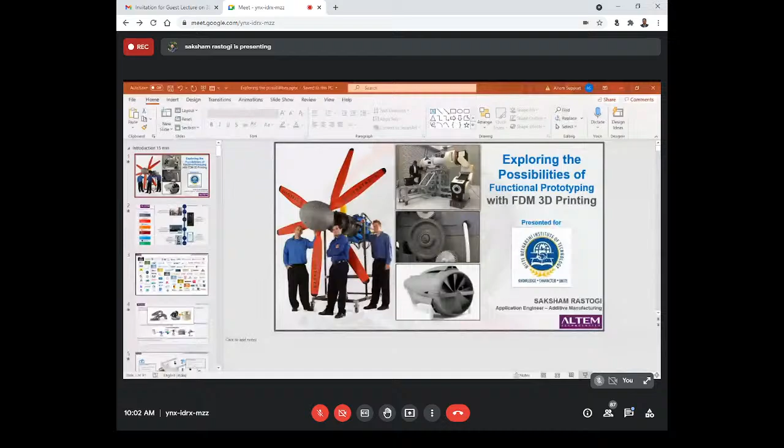So just to give a small introduction about us, we Altem Technologies provide complete 3D innovation platforms, and we are associated with many industrial leading companies like Dassault Systems for CATIA solutions, for simulation solutions like Nastran and Adams for fluid dynamics or for manufacturing simulations. We provide solutions from MSC Software.

Then for plastic 3D printing, we are associated with Stratasys in India. And for reverse engineering and 3D scanning applications, we provide solutions from Artec 3D, which is a handheld 3D scanner. Then for life science simulations like material developments or drug discovery developments, we provide BIOVIA solutions from Dassault Systems. And for 3D bioprinting, we are associated with Cellink Life Sciences. We are in the market since 2011, and since then we have been able to bag various industrial awards from MSME, Stratasys, Frost and Sullivan.

So we look into our partial customers list, where we have provided solutions to various industries like automotive OEMs, Ford, Ashok Leyland, Hyundai, automotive suppliers, and also to educational and research institutes like NSIC, IIT, CTTC Bhubaneswar, VIT University, Jadavpur University, and many more.

So if we look into our manufacturing challenges today, then the first challenge is the cost to build. So there are various tools in the manufacturing process. We have lots of tools and jigs and fixtures, and also the automation line components or end use parts, end of arm tools for robotic automation. So for that, the tools or the fixtures require a lot of cost to build, and time also.

Then again on the heavy materials, so instead of using steel, aluminum or solid blocks of metal materials, we can use plastic materials now. So we have some super polymers through which we can replace the metal end use parts or the metal tooling or fixtures on the manufacturing floor.

Then also the operator requirements like the lack of design knowledge, weight, size, shape, and production errors. So these kinds of errors which can happen with the operators on the manufacturing floor can be minimized. And also the productivity. So the tools which are made of heavy metal materials are not ergonomic. They provide very poor ergonomics on the manufacturing floor, and can cause fatigue to the users or the operator. And also the automation speed is limited by the weight of the tool.

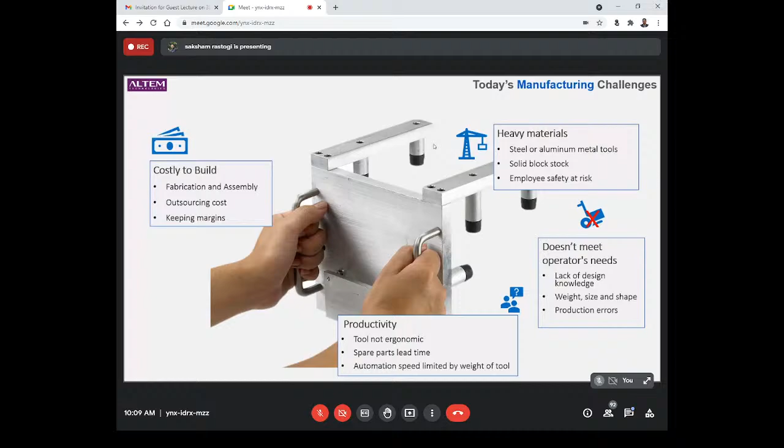Okay, so if a heavy metal tool is used on the manufacturing floor, whether you are lifting it through the machine or by hand manually, it can reduce the ergonomics, it can provide very poor ergonomics and can slow you down on the manufacturing floor.

Then the lead times. So the lead times for the manufacturing, for the automation tool lines like jigs and fixtures or for the quality inspection tools, it takes a lot of lead time to manufacture and then use them. So the tools on the shop floor take weeks to months to produce.

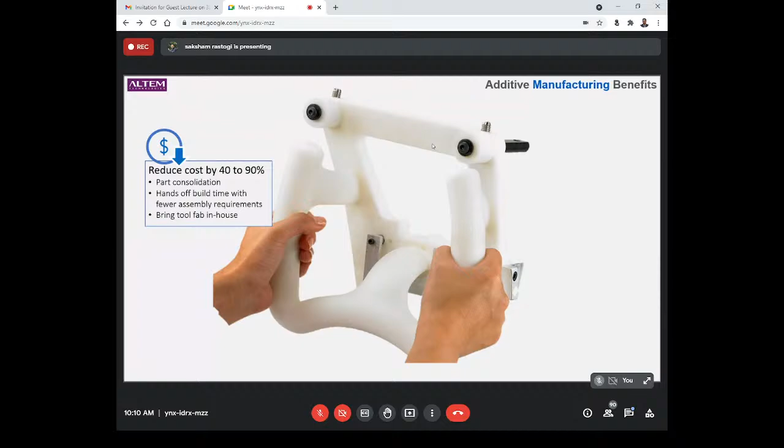But all these challenges can be taken care of by additive manufacturing, which has been considered a technology under Industry 4.0 around the world. So this technology can help to reduce the cost by 40 to 90% for your prototypes or for the tooling parts or for the end use parts. You can replace the metal parts with polymer parts, which can make the component 3 to 7 times lighter. So we have the engineering grade thermoplastics. We have 20 plus FDM materials available with Stratasys.

And in these parts, we can modify the designs. We can modify the infill density of the material, which can help make the part lighter and more ergonomic on the manufacturing floor. Then, considering the operators on the manufacturing floor, we can reduce the safety issues. We can improve the ergonomics. We can customize the geometries, which are much more efficient and much more ergonomic for the users. We can increase the productivity, so we can reduce the cycle times of the production. We can make lighter end of arm tools for robotic automation.

We can optimize the designs by considering the additive manufacturing design guidelines, and we can also make an accurate part, and also we can reduce the bill of material. So suppose a part consists of 10 to 15 assembly components, okay, so with additive manufacturing we can reduce the number of assembly parts, and we can make one part integration.

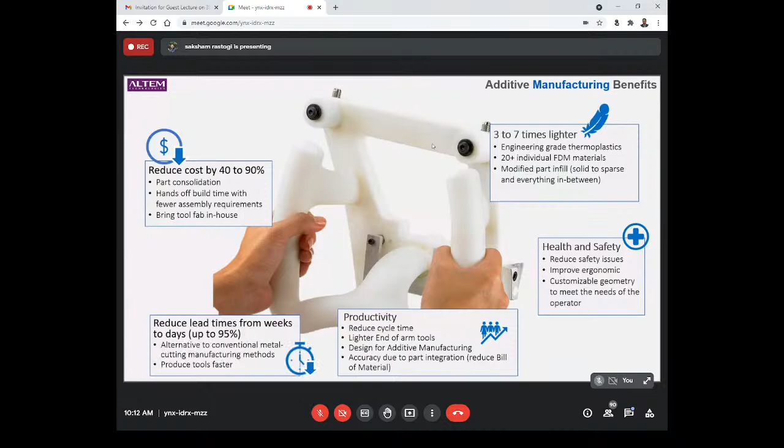So in the photo you can see this fixture tool is the symbol fixture tool, or you can say the logo fixture tool for the automotive industry. So in this example you can see there are very few assembly components. This whole white structure is 3D printed in one shot. So these kinds of tools can be made in one shot, and we can reduce the lead time from weeks to days. There are some examples where customers are able to reduce lead times by up to 95% on the manufacturing floor, making their production of tooling faster.

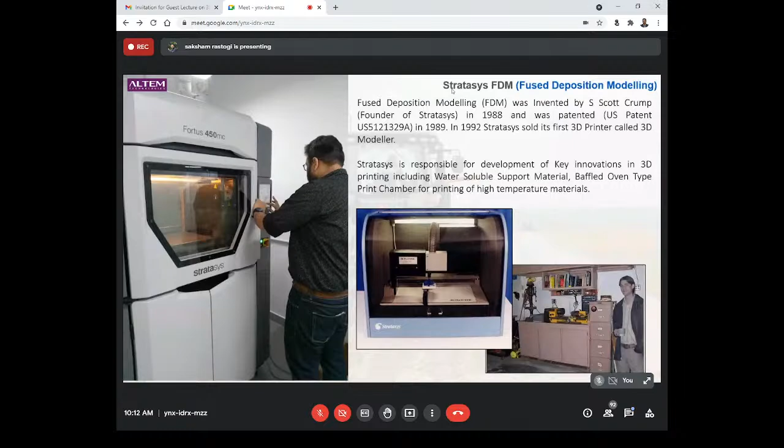So let's introduce our Stratasys FDM technology. FDM is fused deposition modeling, which was invented by Mr. S. Scott Crump. He's the founder of Stratasys, and he founded this technology in 1988. This was the second technology invented for additive manufacturing, and it was patented in 1989. From 1992, they were in the market selling their first 3D printer. And since then, they have developed a lot in the machines and the materials that are available.

So to make the work process simpler, they have included water soluble support materials, and also to maintain the temperature inside the machine, they have an oven type print chamber for printing high temperature materials.

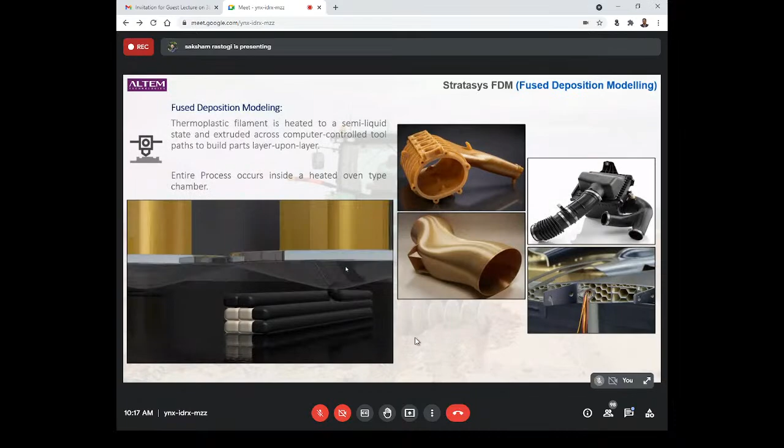Similar to a hot melt glue gun, uncoiled material is slowly extruded through dual heated nozzles. The extrusion nozzles precisely lay down both support and thermoplastic material upon the preceding layers. The extrusion nozzle continues to move in a horizontal XY plane while the build platform moves down, building the part layer by layer.

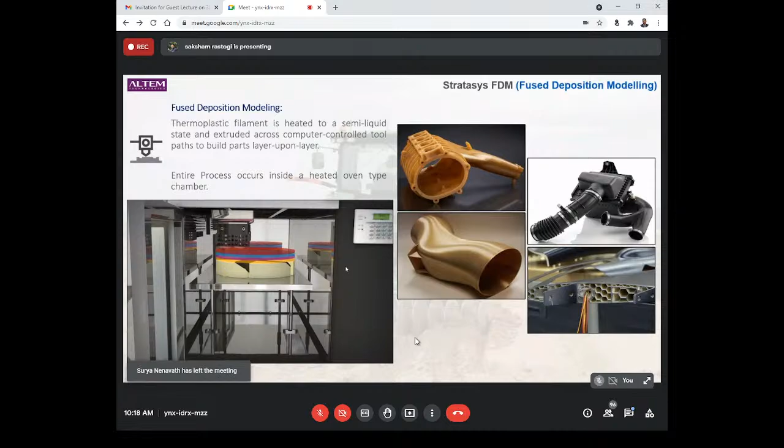So as you can see, it uses a dual nozzle system where one nozzle is for model material and the other for the support material. So this support material is basically the dissolvable material. So it's just a small demonstration video about what the technology FDM is, what materials we have, and some of the parts.

Fused deposition modeling is a 3D printing method that makes durable objects out of the same plastics you see in everyday products. With FDM, the 3D printer takes a spool of plastic filament, melts it, and extrudes it onto a tray to build a part layer by layer from the bottom up. FDM materials are all industrial-grade thermoplastics. That's what makes the resulting parts so tough. And it's also why FDM is changing the way industries design and manufacture.

With FDM, a designer can sketch an idea and test it the same day. Industries can cut lead times and costs. Products turn out better and get to market faster. FDM parts are helping to build the cars you drive. They're in the airplanes you fly in. They're in the medical devices that save lives. FDM is cutting waste in manufacturing. It's helping engineers power remote villages in Africa. It's helping farmers feed an ever-expanding population. And the ideas keep coming.

So in our Stratasys FDM technology, we have a variety of materials, starting from the standard materials, which are the ABS and the ASA materials. So ABS is a very standard general polymer material, which has been used in the automotive industry to make rigid and strong parts.

The ASA material is developed by Stratasys, which has similar mechanical properties to ABS, but this is a UV resistant material. So UV resistance means you can test out the prototypes and even make end use parts, which can be used in outdoor conditions and can maintain the finishing and also the functionality of the component without any deformations or warpages to the polymer.

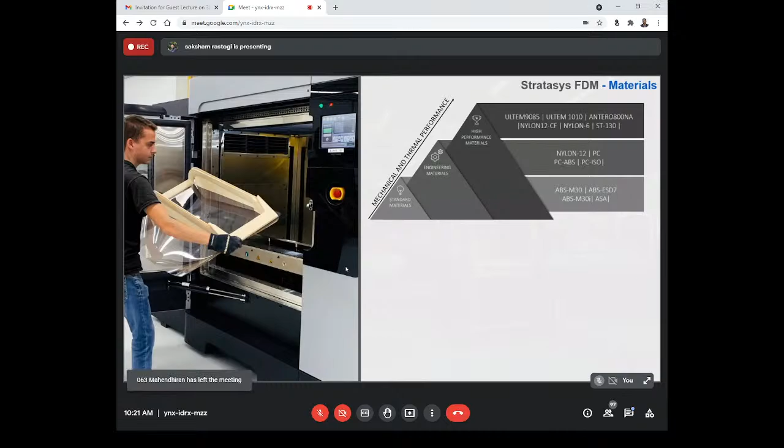For high performance materials, which can be used for high functional testing, to make end use parts, or for tooling applications for the automotive and aerospace industries and various manufacturing technologies, we have Ultem 9085, Ultem 1010, a PEKK based material, which is Antero, a nylon type carbon fiber composite material, nylon 6, and also a special material for tooling applications, which is called sacrificial tooling. So we have the ST130 material also now with us.

So what makes the Stratasys machine an industrial grade machine? Why industries are adopting this technology is their key process control features and also their easy workflow.

We have the motion control components which are thermally isolated from the build chamber, as this build chamber can go up to a temperature of 250 to 300 degrees Celsius. Because of this high temperature, the motion control or electrical components can get damaged. So Stratasys has patented this technology, isolating all the electrical and motion control components outside the build chamber, so that your machine can have a longer life and run 24/7 on the manufacturing floor.

Also important are basic features like the high temperature self-adhesive build tray, separate toggling and self-cleaning tips for model and support material, multiple material channels with auto swapping technology, and automatic material feed, which tells the user how much material is remaining or if material needs to be changed before starting the print job.

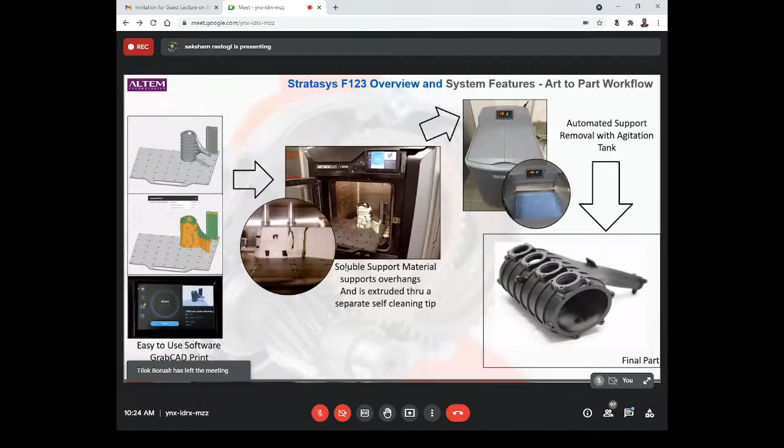The machine uses model material and soluble support material for overhangs or undercuts inside the geometry. After printing, you put the part into the agitation tank, which has a chemical solution of sodium hydroxide and sodium metasilicate, and the soluble support dissolves within a few minutes, giving you a final part without any support marks or structures inside the geometry. This part can be used for further design validation, functionality testing, end-use parts, or directly as a tool on the manufacturing floor.

The applications that can be done using FDM technology: first is prototyping, rapid prototyping, for design and functional validations, which we can use on the shop floor and in R&D departments.

For rapid tooling applications, we can bridge the gap between complex tooling structures and the high lead time or cost involved in developing tooling applications on the manufacturing floor. We can make customized tools and use them for manufacturing processes like sand casting, thermoforming, or composite tooling applications directly.

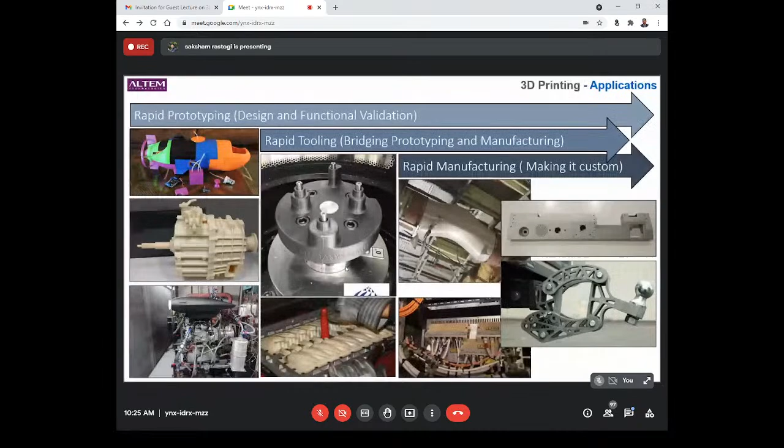We can also do rapid manufacturing, making customized parts. In some cases, the customer doesn't require mass production, so in conditions where you need to produce 50 to 100 or 200 parts for customized batch manufacturing, for industries like automotive, healthcare, or aerospace, we can use this technology.

We can reduce the cost of tooling, reduce the cost of manufacturing, and reduce the lead time for manufacturing customized batch manufactured parts.

For industrial applications, we can use it for prototyping large parts, like front or rear fenders of 4-wheelers, 3-wheelers, or 2-wheelers, and for functional prototypes for engineering solutions in design and production.

We can use it for jigs, fixtures, and tools applications, like creating patterns for sand casting, making fixtures used on CNC machines, end-of-arm tools for product line automation, composite tools and gauges, high and low temperature masking, and protective parts with composite Nylon 12CF material or elastomer materials.

We can also use it for production parts, like spare parts for batch manufacturing, parts requiring less than 1,000 volume in numbers, and replacing metal parts with high functional polymer materials like composites.

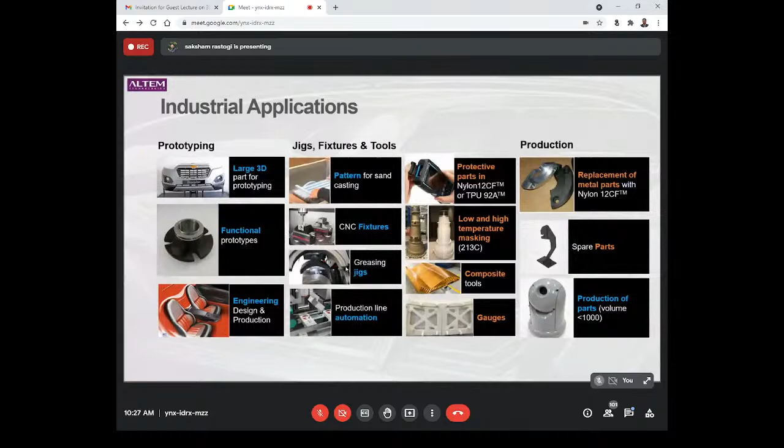Looking at the manufacturing floor, there are several departments where we can utilize this technology. First, on the assembly floor for tooling applications, making customized parts or fixtures for automation lines, or end-of-arm tools for robotic automation systems. We can also use it for R&D applications, for product development, and for tooling development on the manufacturing floor.

We can also use it for quality control, making customized holding devices, measurement aids, and customized gauges for quality control inspection.

We can make packaging devices and packaging trays for spare parts or components which require very safe handling on the manufacturing floor, so we can make customized packaging trays for the manufacturing floor. We can also use it for safety engineering or health and safety departments, where you can use this technology to make customized tools to provide safety and more ergonomic production environments.

And also we can make equipment for robotics and also for SPMs, special purpose machines, where we can make functional components which can be considered as an assembly, or where you need to provide very heavy strength or replace heavy metal parts instead with super polymer parts.

So apart from interior parts development, we can also use it for exterior styling developments - like the dash panel, center consoles, AC vents, or front fenders, rear fenders, fog lights. So we can use this technology.

We have the capability to print 1.4 meters of total length with our Stratasys F900 printing solutions. So this is a front grille which is printed on the F900 in less than 24 hours, which conventionally can take more than a week or two weeks, and even a month, for these kind of large prototypes or large components. So we can reduce the turnaround time by 50% compared to traditional methods, and also accelerate our time to market to launch products, which can make an impact on the business by launching products earlier into the market.

We can also make textured parts with this FDM technology, which provides a very good surface finish. There are companies making customized solutions, customized front grilles or interior parts for customers who want customized solutions. We have ASA material which comes in 8 colors, and we can print any kind of texture over it. And this part can be fit directly onto four-wheelers or two-wheelers or any automotive vehicles, and it can be directly used and customized accordingly per the user.

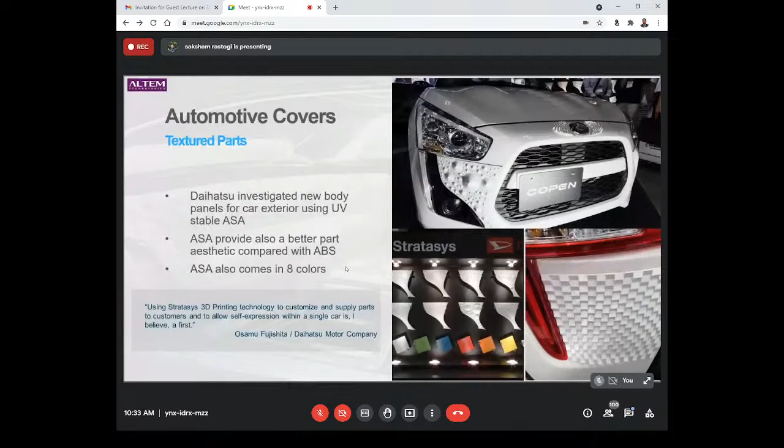So apart from passenger vehicles, what sort of developments can we do in the industry from the perspective of engineering and automotive part development? This technology can also be used for mobility transportation.

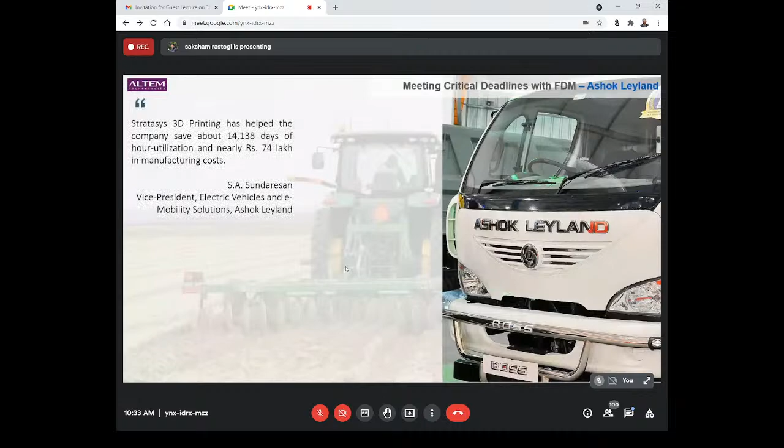So for commercial vehicles, the first example is Ashok Leyland. Ashok Leyland has adopted this technology, and for the last 4 years they have been using it for complete product development, whether it's under-the-hood engineering parts like the gearbox casing to check its fully functional mechanism. This is the data given by them - for the gearbox, conventionally it used to take 45 days for them to develop it, and with 3D printing they reduced the turnaround time to about 40 hours.

So there is a 90 to 95% reduction of lead time in product development. They are also making the clutch housing development for gearboxes and the blower covers for the cabin interior parts. This technology Ashok Leyland is using since the last 4 or 5 years, and they are able to save a lot of cost and lead time. They are also now using it for development of electric vehicles or e-mobility solutions, to fasten up their product development and launch their product into the market ahead of their rival companies.

This is another example from Premium Transmission, which makes the complete gearbox, or the complete mechanism of the gear generations or gear components. With the traditional method, they used to make the scaled down components in 42 days, but with FDM technology, they are able to make them within 4 to 5 days.

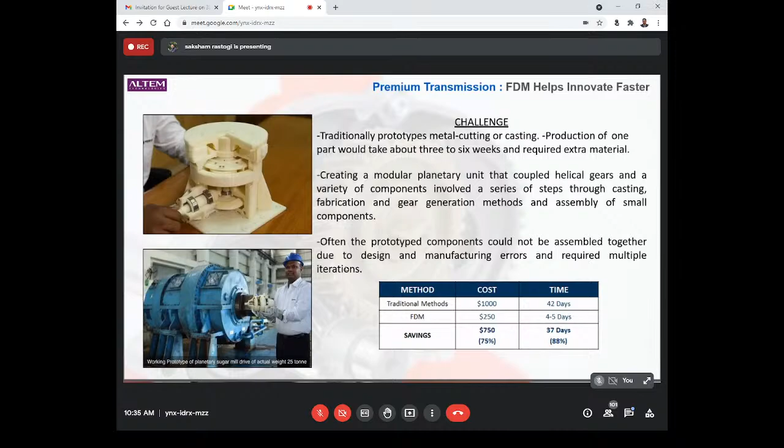You can see that the complete mechanism, the complete assembly, can be created, and you can fit the bearings or use the fasteners to join the components together. You can check its functionality, its design, the tolerances between the components, and its functionality and movement before you finalize the design and go into final production.

This is another example of end use part application. There is a company, Angel Trains, from England. They make passenger trains, and also the components for the interior and exterior of the passenger trains. You can see they printed the armrest, grab handles, and table trays, and these 3D printed parts are directly fitted and used in the transportation systems for the passenger trains, like the 3D printed grab handles.

These thermoplastic polymers are providing very good strength and capability to reduce metal parts, and also enabling the organization to go for batch manufacturing by reducing their lead times and manufacturing costs.

These are some examples which can be manufactured, and are being used in transportation systems. Cable clips, connectors, or brackets can be manufactured using Ultem 9085. HVAC air duct systems can also be manufactured. Handle safety systems, where you can make the part with Ultem 9085 material, and wrap glass fiber or carbon fiber sheets around it to make it stronger for the final end use parts, like TV screen housings, electric cable holders, and individual table seat armrests.

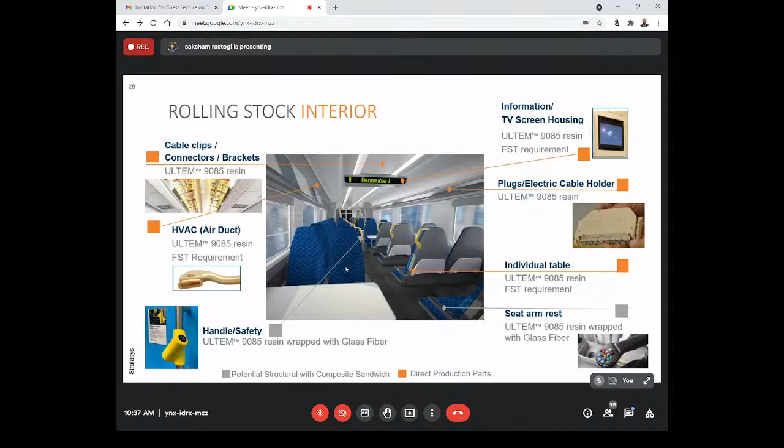These are some examples for the interior. If we look at the exterior side, lighting or sensor housings, large covers which are more than 1.2 to 1.5 meters, we can use composite material like nylon CF, and wrap a glass fiber sheet around it to give the part more strength for the final end use part. Front bumpers with Ultem 9085 material, air vent systems, and also the headlamp housings. These are some of the components being made and used as end use parts in transportation systems.

This is one more example from GVL Poly, who makes agriculture equipment. This is a US based company, and they are using the Stratasys FDM 3D printing. This is a one-shot video. I'll just play this.

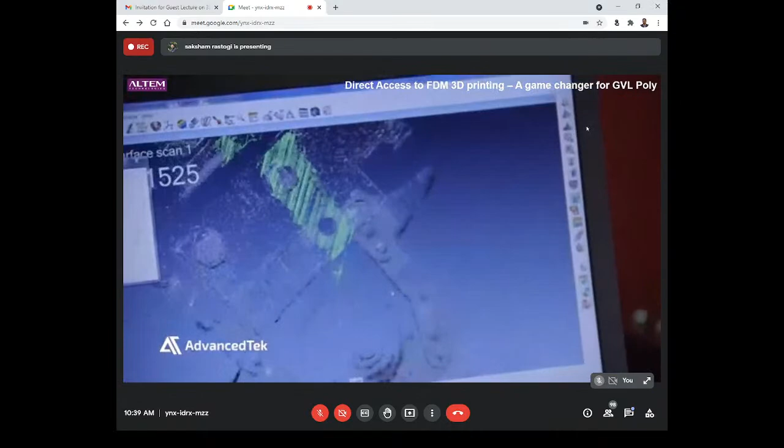Poly is a custom rotational molding manufacturer. With our 3D printer from AdvancedTek, we've really changed the concept of what GVL Poly is and what we can be. In working with AdvancedTek, our processes, our concepts, our parts that we've produced here at GVL Poly are far more complex than they were before we had 3D printing. Printing's enabled us to really think outside of the box. At this point, there'd be really no way for us to go back and look at manufacturing at GVL Poly without our 3D printer.

Our most recent advancement for corn harvest has been improving the wear tip. It has to be able to keep all of the corn feeding into the corn header. It has to be able to collect the crop without folding underneath and damaging the crop or the corn header. So we're taking a product from a 3D printer, we're bolting it onto a piece of harvesting equipment in constant contact with the ground.

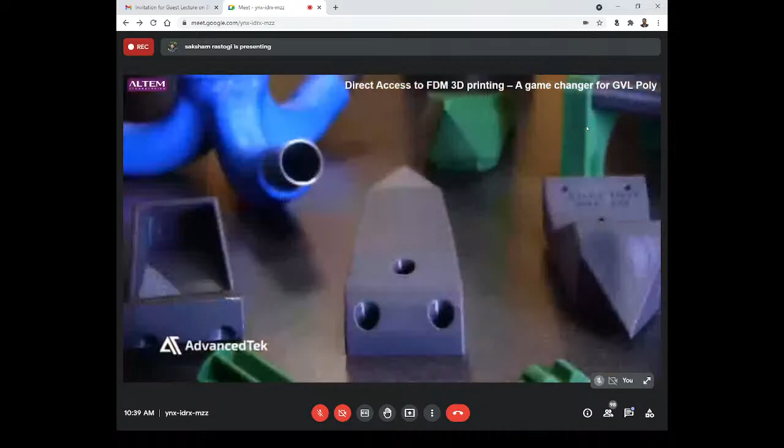It gives us all of the testing that we need to do to test fit, form, and function. Without the 3D printer, without being able to do those revisions in very short order, and have a product from the printer that we can field test, it would have drawn a project like this out 3 to 5 years. We were able to do it in one harvest season and test dozens of variations of this wear point.

One of the other innovations that we've been working and doing with our 3D printer was on the end of the corn header, we're able to produce an auger to help pull in the down crop. Print several models, get them out in the field and test them. Help the farmer pull the crop in during that harvest season, make modifications on the fly.

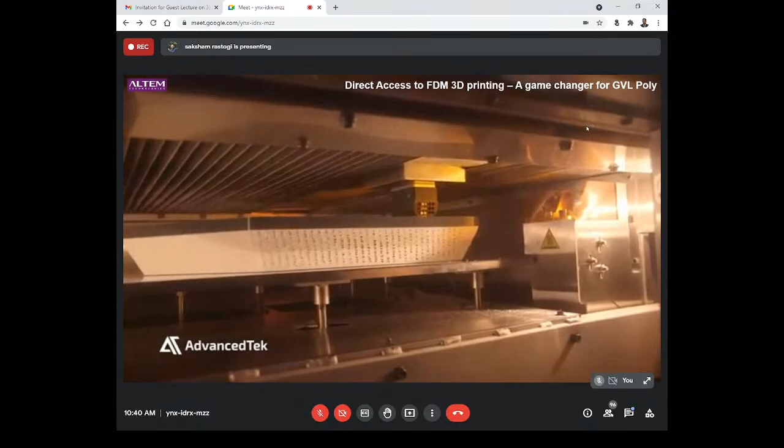As a former banker and now CEO of GVL Poly, we really looked at the return on investment of 3D printing in a much larger picture than just the standard production equipment. When we brought in our 3D printer and showed them that we, as a small company, could invest in cutting edge technology and give us a very expansive product offering capability, it helped us get the employees to believe in where we were going.

In the last 2 years since investing in our 3D printer, we've added 7 new positions based on the new demand that we have in that area. We also have added additional manufacturing jobs related to new product coming out on the floor much faster than we would have in a normal prototyping or R&D setting.

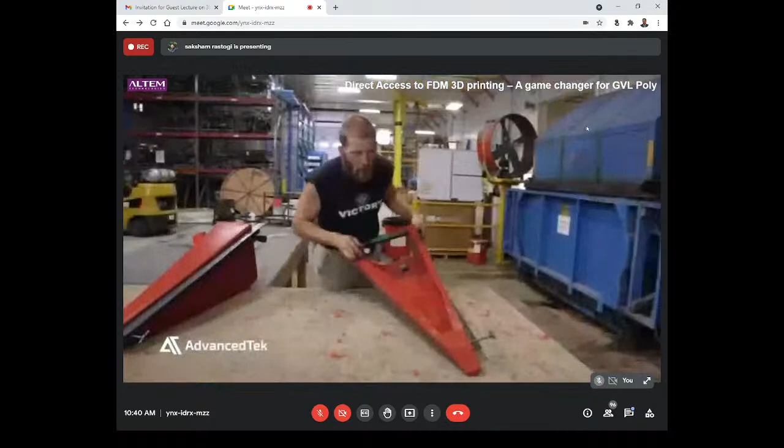All of the support we receive from AdvancedTek, whether it's design or looking at the 3D printing technology, is really something that we just can't live without at this point. Having our printer in-house and having that available at any time 24/7 to our designers and engineers has really been a game changer for our team.

Not having to wait for some other service provider to have time available or to figure out how the design will print. All of the software, all the engineers and designers of the 3D printer are in one location so we can utilize it to its fullest potential.

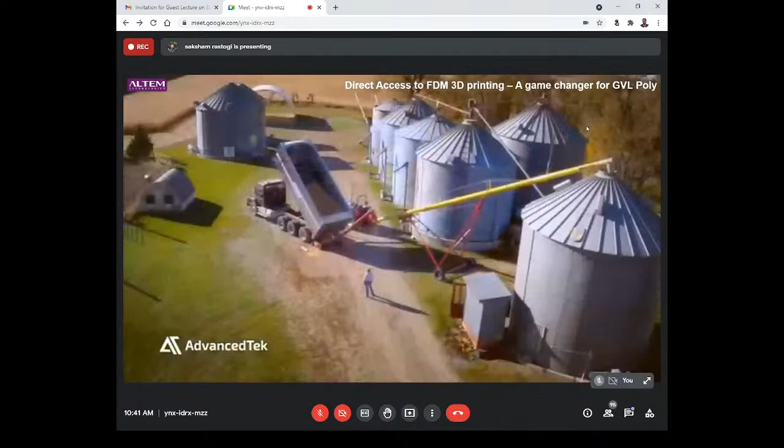Crop farmers plant in the spring and they harvest in the fall. Their entire living is based on a risky proposition. They have to have the right tools. The demands are getting more and more on the farmer. Our reaction time, our time to market has to be shorter and shorter. So we're able to do that with 3D printing to make sure that we're giving the farmer the best they can have to make food and crop.

GVL. So you have seen that not just for the passenger vehicles or for the commercial vehicles, but also for the agriculture industry, we can use the Stratasys FDM technology in a much more efficient manner, and the in-house capability allows the users or the organization to make and launch their products in a faster manner. So there is a faster time to market funda in the organizations.

So by using the 3D printing technology, the FDM technology, we can do the design and the functional validations in real-time conditions, and we can do the product development in a much faster manner compared to our conventional processes, which can take weeks or months of lead times to develop the product, and it slows down the launch of the product into the market.

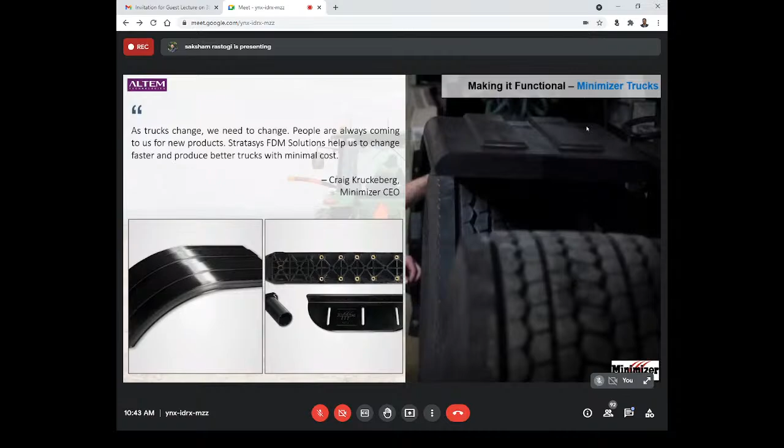So this one more example is from Minimizer trucks. So this is a company who uses a Stratasys FDM solution and provides better truck solutions with a minimal cost. So this is a short video of how they are using the Stratasys FDM technology and how they are doing the functional testing in real-time conditions.

My name is Craig Kruckeberg, CEO of Minimizer. We are a manufacturer of plastic truck parts in the heavy truck industry. We've been in business since 1984. Here at Minimizer, some of the projects that we work on are injection molded components. And primarily right now, we're looking at several mounting brackets.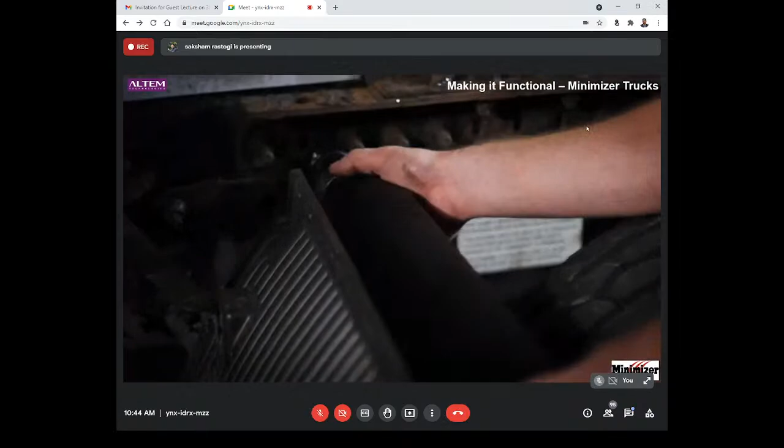A lot of these parts are made from glass fiber and rough, rugged plastic materials. And so it's a challenge to prototype those products. With the Black ULTEM material, it's very high tensile strength and rigid. We found that Black ULTEM is a good alternative for us to prototype these mounting brackets and even take them out into the field on a truck and test them out.

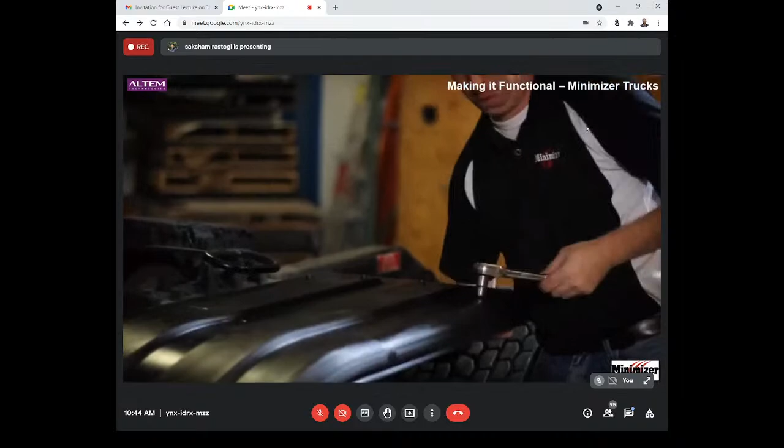When we make an FDM part, we mount it on a truck, so a lot of times there'll be a lot of drilling using fasteners, even mating parts together. The Black Ultem material is valuable because if there needs to be any sanding or cutting of the part, it allows us flexibility to do that, but still have an aesthetically pleasing part to put on the vehicle.

The reason for the Black Ultem, and we're excited to see that, is that's 90% of the color of product in our industry. We caught one of our OEs actually using the product in trials with the Ultem, and they decided that in this application, we don't need that many to tool up for it. So if you could just print us out 15 of these for a military contract, they just need 15 units right now. So they said, okay, give us that part back. We'll give you the Ultem in black.

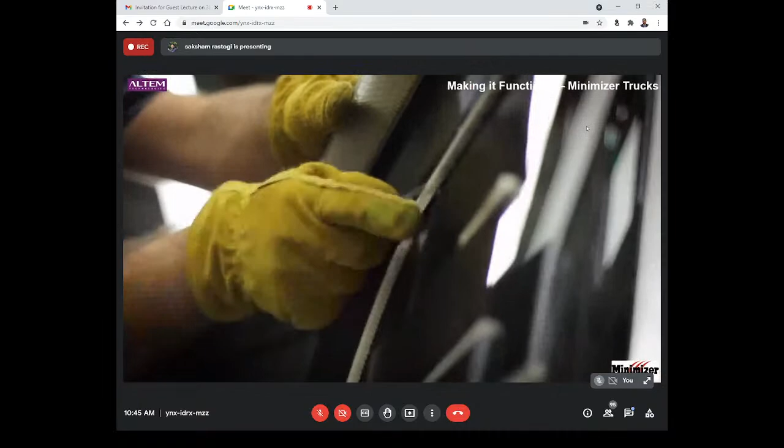And so that's when we found out that this came out. We were going to paint it, but now that it's coming out black, we're not going to paint it. Having the black material is a big bonus for us. We don't have to spend the time to finish the part. And at the same time, we get the same material properties that we look for in the Ultem material.

Okay, so you have seen some examples from the automotive industry, how for commercial vehicles, passenger vehicles and also agriculture equipment product developments, we can use the FDM 3D printing solutions with engineering plastics to high performance materials, and how we can use it not just for prototyping, but also as end use parts for the interior or exterior components of mobility transportation systems.

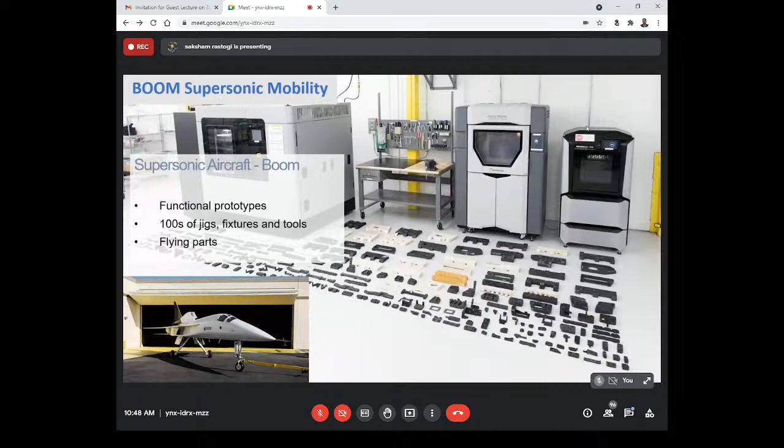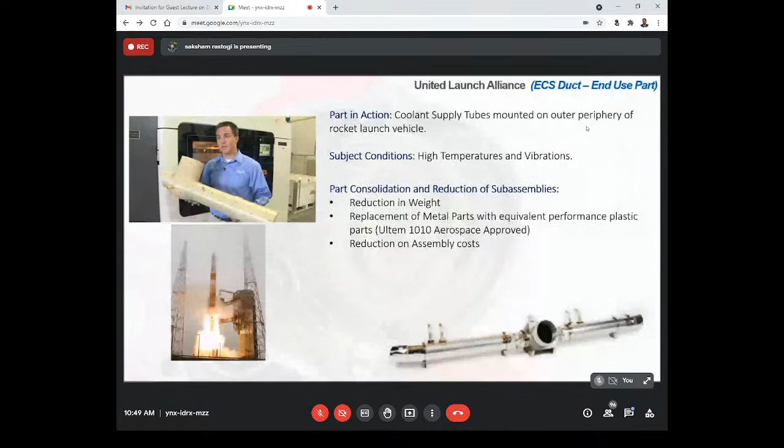So they used the Ultem 1010 aerospace approved material, which enabled them to reduce the weight, the number of assemblies, and the assembly cost. They were able to reduce the number of assemblies from 140 to just 16 parts by using FDM technology, and the cost of manufacturing was reduced by 57%.

So not just for the high engineering applications or for the automotive applications, but you can also use it for the development of UAVs or drone systems, or the complete chassis or body of the drones and UAVs. So this one company, Aurora Flight Sciences, they make commercial UAVs, for commercial use and also for defense organizations. They develop customized UAVs and drones.

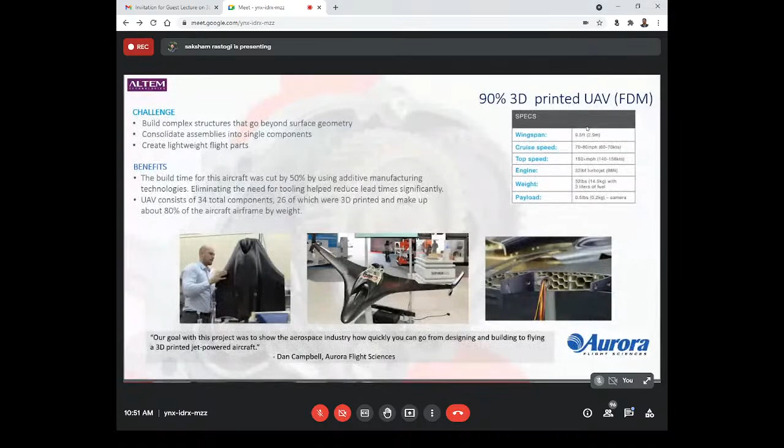So they are using this technology, and they are also able to cut down the assemblies. This complete UAV consists of 34 components, with 3 liters of fuel. So the benefits they've got is that they are able to cut down the build time by 50%, and also eliminate the tooling, which helps reduce the lead times for their production.

So there are various examples of 3D printed drones. Many organizations and research institutes are making either 3D printed drones or customized components, or mountings which can be fit onto the drones and used for various applications, like surveillance systems and also agriculture systems.

In the agriculture industry, drones are now being used in a very efficient manner. On the fields, we can use drones in various applications, and we can use this technology to make customized components or end use parts to be fitted on the drone systems, and we can utilize the drones in a much more efficient manner now.

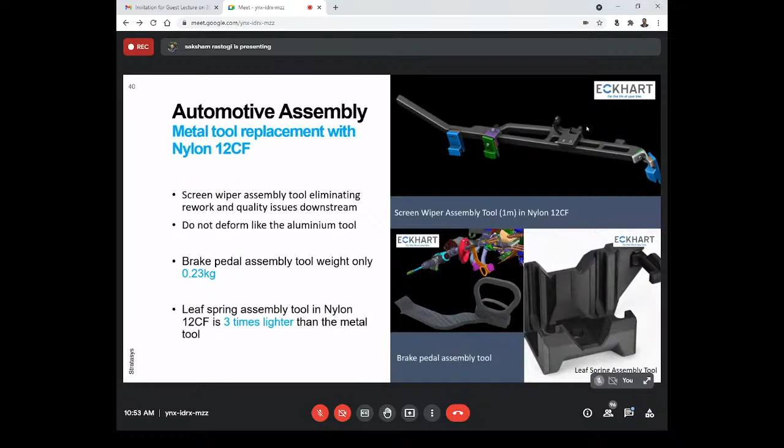So apart from the end use parts or rapid prototyping solutions, you can use FDM solutions for automotive assemblies or for tooling applications. One example of a tooling application is the screen wiper assembly, which is around 1 meter in length, and it has been made in nylon 12 CF to provide good stiffness and more strength in the part. There's a brake pedal assembly tool which weighs just around 230 grams, and there is a leaf spring assembly tool, again manufactured in nylon CF composite, which is 3 times lighter than the metal tool.

It can also be used for automotive lines, greasing jigs, and end of arm tools. The Ultem 9085 material is a chemical resistant material, so you can use it in applications where you require the greasing process or greasing functionality. It can reduce lead time in manufacturing by 70%, and it also enables making complex assembly tools in a fraction of the time compared to the conventional manufacturing process.

For end of arm tools for automation systems, like clamping tools, mounting tools or holding tools, we can use Ultem 9085 to provide more strength, good thermal resistance, good chemical resistance, and higher stiffness, and we can replace metal clamps with these polymer parts.

For tooling applications, John Deere, globally and in India also, is using it for factory floor tooling solutions. They are making more ergonomic and lightweight tooling solutions by replacing conventional aluminum or steel fixtures and jigs, and they are able to reduce the weight of large tools and also their cost of manufacturing by very large margins.

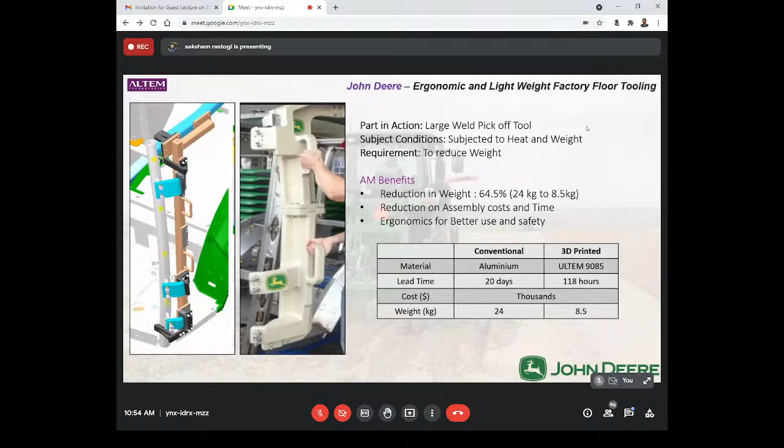So apart from rapid prototyping, tooling applications, and end use parts, there are some tooling areas where you can use this technology on the manufacturing floor. First of all is jigs and fixtures. We have seen many examples of jigs and fixtures.

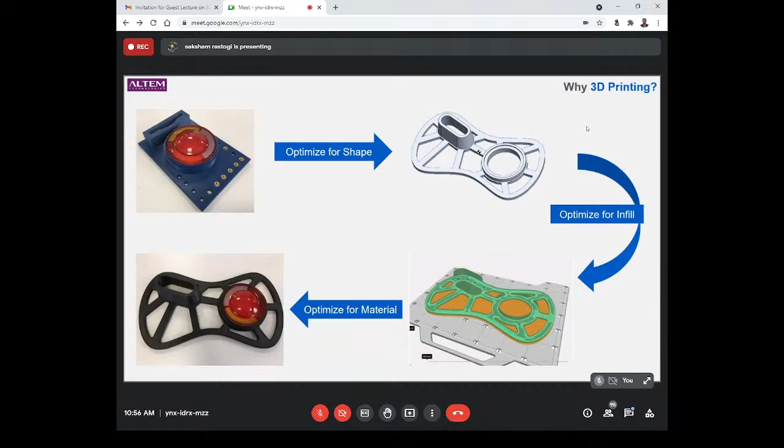So 3D printing fits into this solution because we are able to optimize the shape and the design, so that we can reduce material consumption and make the part lighter. We can also optimize the infill of the material in the design, and we can optimize the material, like using Ultem or nylon CF material for lighter weight parts, which can provide a good strength to weight ratio compared to heavy metal fixtures.

So the benefits that you get are the low cost, on-demand solution, ergonomically friendly, easily iterated, consolidated assemblies, and we can reduce the lead time by 2 days or 3 days instead of a number of weeks or months. We can reduce the weight and we can make it more ergonomic.

So this is one example for the tooling solution, this one company, Solaxis. They have replaced the metal fixture which weighs around 68 kg with a 12 kg final fixture tool using the FDM solution. They're able to reduce their lead time from 16 to 20 weeks to 3 to 5 weeks. And they're also able to achieve their ROI within 12 months.

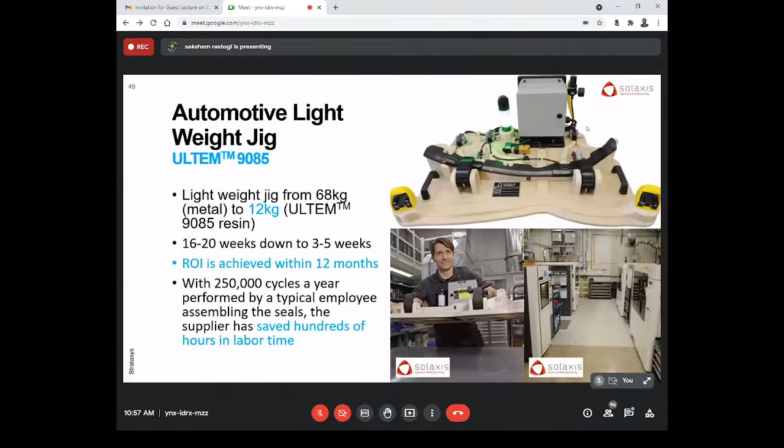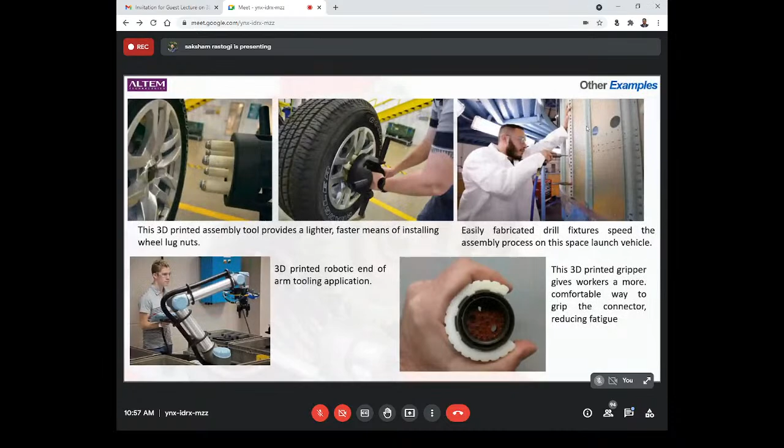So these are some of the examples where you can make the customized tools and fixtures and the end of arm tools for robotic applications or for assembly systems or manufacturing systems. And also for quality control, like CMM inspection fixtures, customized gauges, and packaging trays, and also the elastomer materials where you require soft and flexible assembly tools, like to place the badge on motorcycle tanks without damaging the painted surface of the tanks.

So it can also be used for sheet metal forming. The fabrication conventionally is through CNC machining and pressing. The material used for the tooling is metal, and the lead time takes about 2 to 3 days, and it also involves a very high cost in the traditional process.

But with the FDM 3D printing solution, you can make 3D printed tools for sheet metal forming. You can use engineering and high performance materials. You can use it for a tonnage rating of 2 to 3 tons per inch, and we can produce a low volume of production like 500 to 1000 pieces with a single tool. So for applications where you don't require mass production, or you want to test out the tool before making the final production, you can use this technology for materials like steel, stainless steel, and aluminum.

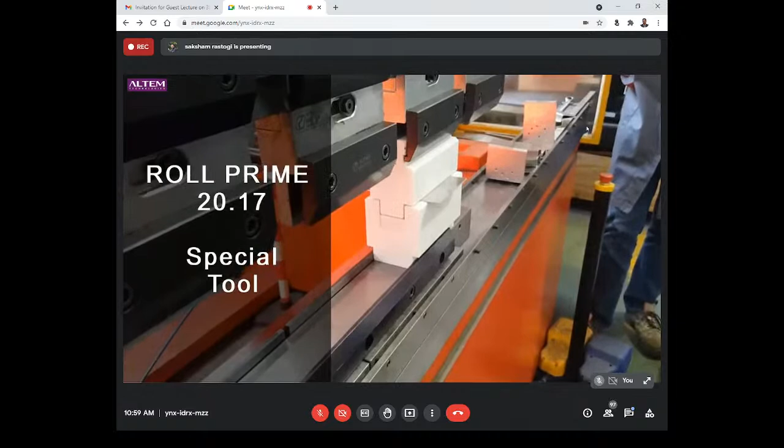So you have seen that this is a 3D printed tool fitted on the press machine, and you can see all the components or systems like the ejection systems or the controlling systems are all fitted on the press machine, and it is capable of sheet metal forming for steel, stainless steel, and aluminum up to about 2 to 3 mm of sheet thickness.

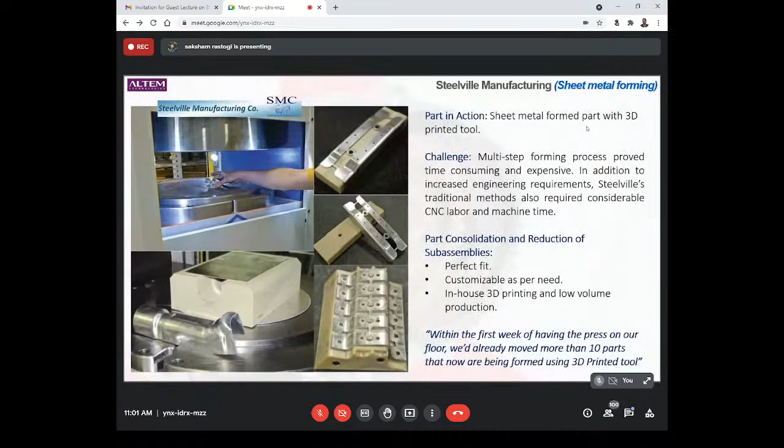So this is one case study from Steelville Manufacturing. They are using this for sheet metal forming. So the benefits that they have got are the customizable tooling application, and also the in-house capability for 3D printing and for low volume production. So where the condition of low volume production arises, we can use this technology to make a cheaper tool with very good strength, where we can make from 500 to 1000 pieces.

And we can use it for thermoforming tooling applications also. So in thermoforming, we use a plastic sheet and we place it on the tool, and by the application of heat and pressure, the sheet takes the shape of the tool. In thermoforming, the traditional process is through CNC fabrication and manual processes. The materials typically used in the market are wood, plaster, epoxy resin, aluminum, or foam. And the production or assembly time takes from days to weeks.

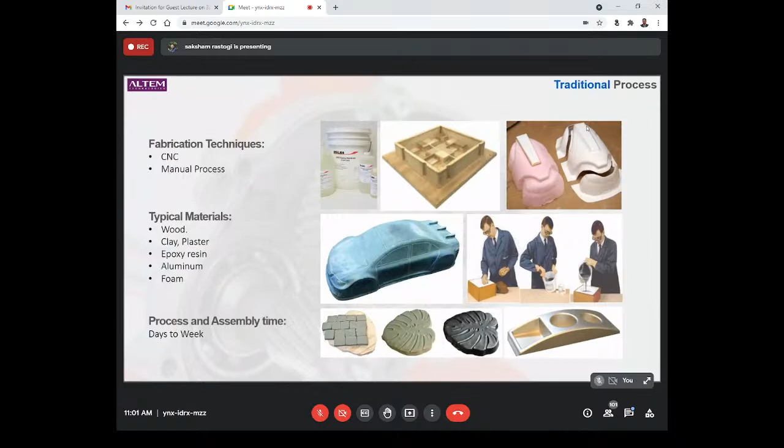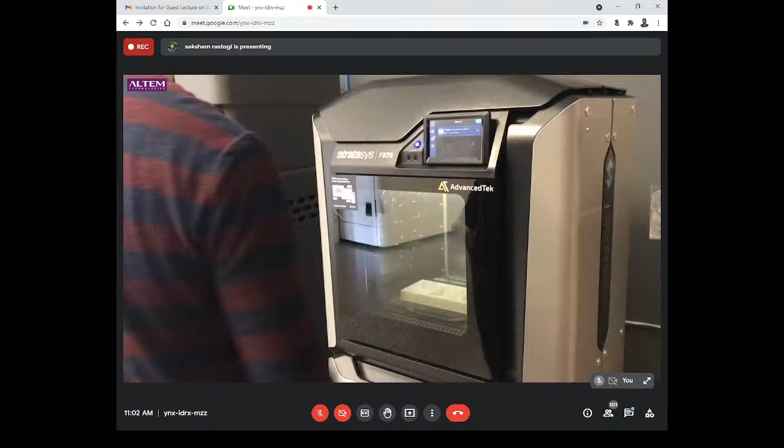So these kinds of challenges can be catered to through the 3D printing application. And thermoforming applications can be used in various industries, like packaging, cosmetic cases, food containers, the medical industry, computer electronics, machinery, and plumbing. So this is one short video showing how you can make a 3D printed tool for thermoforming, and how it can be used for the thermoforming application.

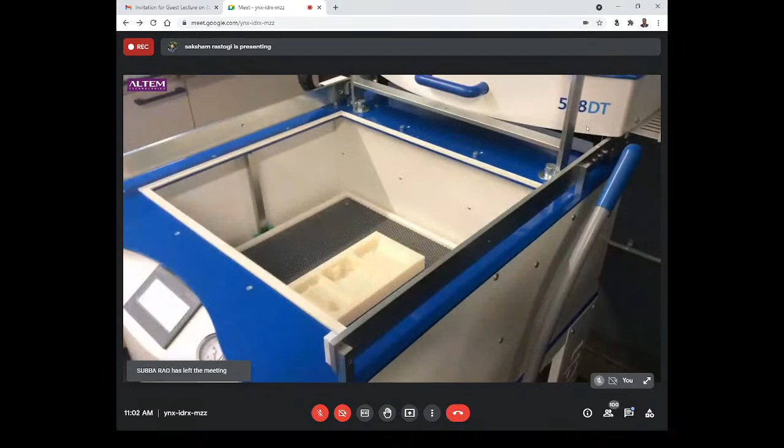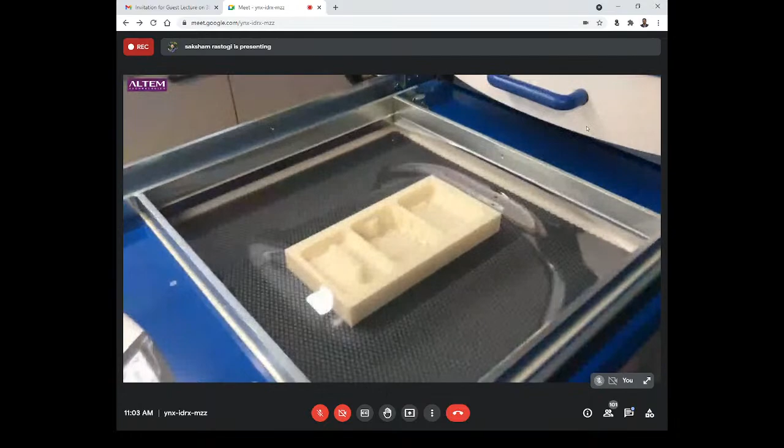So the 3D printed tool is placed inside the machine, and this is a plastic sheet placed over it. So now this plastic sheet will go under the thermal condition. It will get softened up to a temperature. So with the application of some pressure here, this sheet takes up the form of the tool.

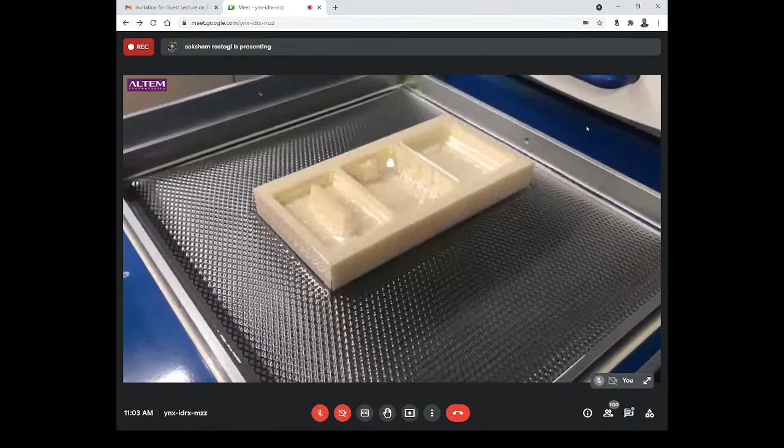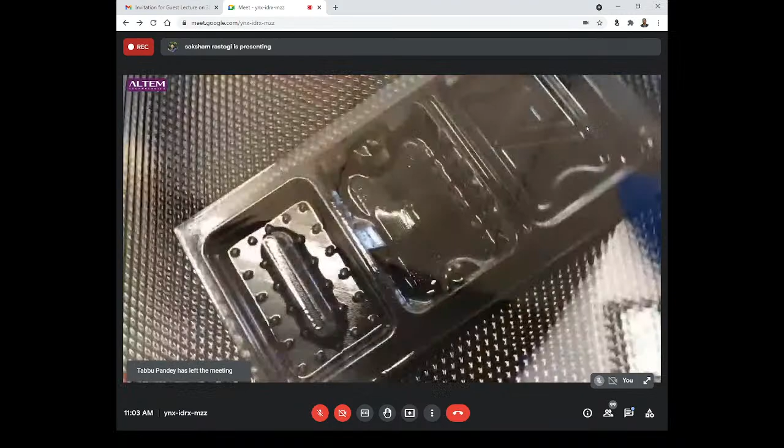So you can see that even the plastic-made tool can be utilized to make the tooling for the thermoforming application. So there are some industries globally and also in India who are using this technology for the thermoforming application. So you can see the finishing or the end product through the thermoforming tooling. So this is one company called Kintz Plastic who makes the thermoform trays.

So the challenge they were facing was the conventional method was very costly, and also it used to take around 6 to 14 weeks of tooling development because of the complexity and the availability of the CNC or the conventional manufacturing machines.

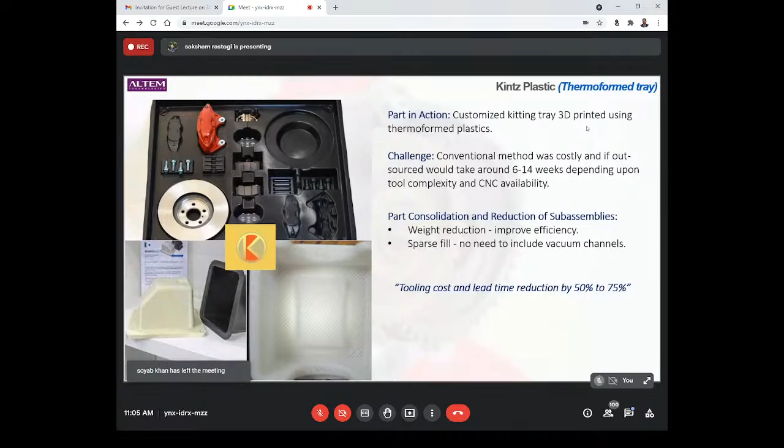So with this part consolidation, the benefits that they have got are weight reduction, first of all, by replacing the heavy metal tooling, and improved efficiency. Also, with the sparse fill capability, they don't need to include any vacuum channels, which were required and which were very difficult for the conventional manufacturing solution for the complex tools. So they were able to reduce the tooling cost and the lead time by 50 to 75%.

We can use the FDM printing technology for the sand casting solution also. So in sand casting, we make the patterns and we pack the sand material around the pattern, and we make the cavity. And into this cavity we pour the molten metal material to get the final metal object.

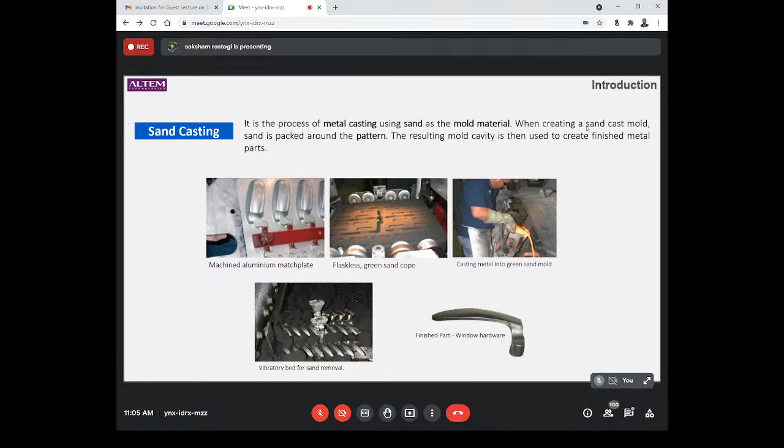So the solution which can be done through FDM is we can print low volumes, like 5,000 plus casting parts. We can make the prototypes and the pilot runs from low to moderate volume. It can withstand the compaction pressure of around 3000 psi, and it can be used for moderate to high complexity designs or pattern solutions.

The materials which can be used to make the patterns are ABS material with a compaction pressure of around 3000 psi, polycarbonate material for pressure up to 6000 psi, and ULTEM material, which is the strongest material and can withstand pressure of around 10,000 psi for the sand casting solution.

So this is one example from the Melron Corporation for the manufacturing of door and window hardware. So you can see in the photos this 3D printed pattern in white color, and the next photo is the cavity mold for the sand casting, and the third photo is the manufactured parts with the sand casting solution.

The first challenge was the additional cost, which was around $5,000 or more than that, and it took around 3 to 4 weeks for the mold iterations, and also to make the runner and gate system, which needs to be cut out separately for the sand casting solution, and then add the match plate.

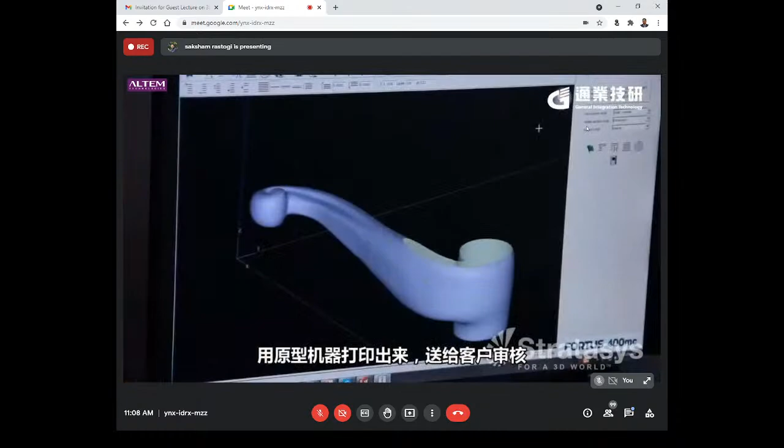So what we did is sit down with them, look at their drawings, look at their crucial dimensions. Then we made a 3D model of the actual part and printed it off on the prototype machine and sent that to the customer for approval. They got back to us right away. Said, yep, absolutely, that's great, ready to go. Problem is, we have a very tight deadline. So can we speed up to get cast products to us?

This is our pattern shop. Once the rapid prototype is approved by the customer, we do a mini insert on a pattern, not the full production tooling. We'll throw the left and right handle on a mini pattern and mount that into a match plate, which we then cast to get actual cast samples of the part to send to the customer for approval.

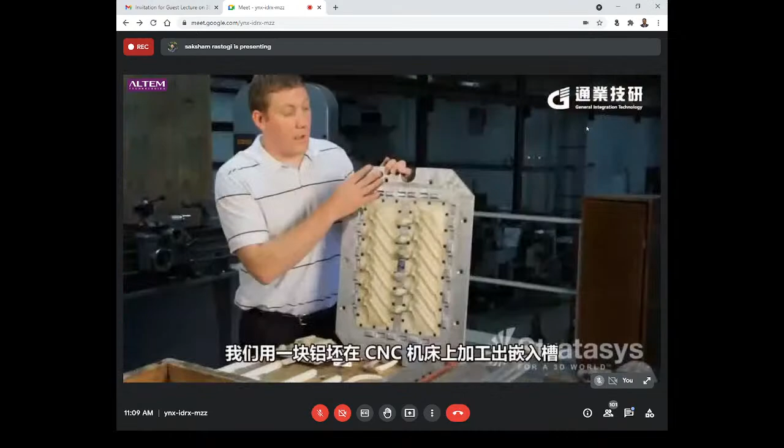Once we get approval from the customer, we have a blank aluminum billet that we machine the inserts out on our CNC or Bridgeports for mounting of the FDM insert. Once these are printed off, we mount them in, then start our post sanding and any other processes needed to make the actual part.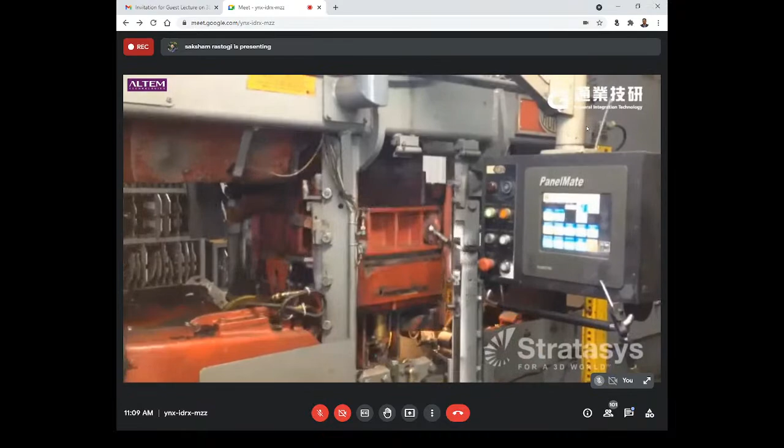The challenges with the traditional method were longer lead times, and you were pretty much set on what you had with your match plate because it's machined out of aluminum. With the plastic, you're not set, but at a very low cost we can print something off, change our parting lines, change our gating very effectively. With that particular project using FDM, we saved about $3,000 per pattern, as well as about 2 to 3 weeks of lead time on the actual production tooling.

They wanted to come back to us again because it was a very easy process to work with. By using the FDM machine and material, it really revolutionized how our business operates, being able to adapt quickly and provide a cost-effective part that is instrumental in us going forward.

You can see in the video that companies like the Melron Corporation are using the Stratasys FDM solution to make sand casting patterns. Materials like ABS and polycarbonate Ultem 9085 are capable of withstanding about 3,000 to 10,000 PSI of pressure, which is required to pack the sand around your casting patterns.

This technology can also be used for composite tooling solutions. The challenges faced in the traditional process are first, hollow composite parts trapping the tool inside, making it difficult to remove. There are also puzzle pieces for complex internal geometries, split molds, and post-curing bonding of the parts together.

The solution Stratasys FDM has developed is the ST130 material, a specialized material for sacrificial tooling for the production of complex composite parts, which can dissolve in a basic solution of greater than 7 pH. This material provides the benefits to make the FDM core.

You can see in the photo that the left side is the tool produced with 3D printing technology, and the right side is the composite fiber part, a hollow composite part produced by using the ST130 material.

We can reduce lead times, cost, and labor work, and also reduce the tooling needed, since we don't require a post-curing bonding solution. We can improve quality by making single piece composite parts, and also lower the risk.

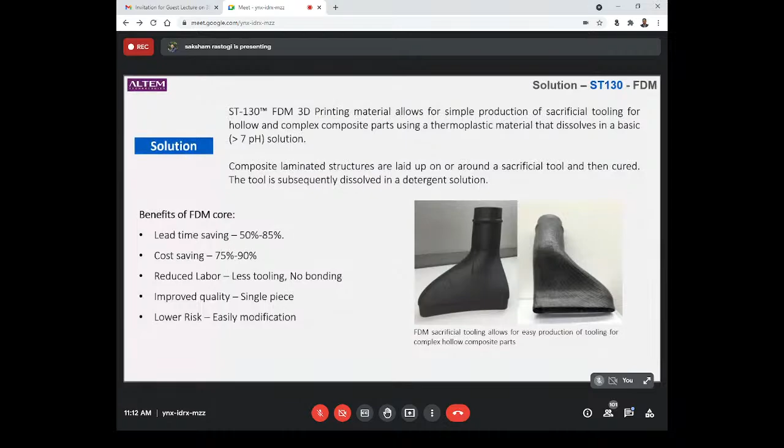This solution provides easy modifications and best fits into the layup process, which could enclose the tool completely and produce a single part.

It's suited for small quantities and high value parts, functional prototypes, and custom production parts, where complex or hollow undercut parts are required.

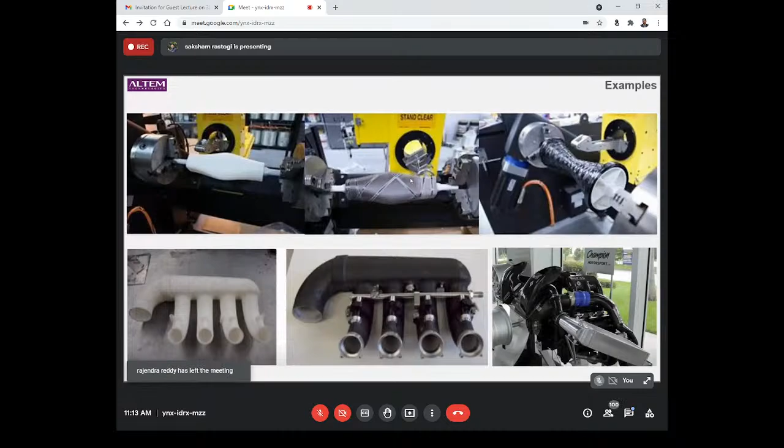These are a few examples made using the ST130 material. You can wrap the sheet around this tool, and this material can be dissolved in a basic solution.

This is the work process. With the CAD data, you make the tool, produce it with ST130 material, do some finishing, wrap the sheet around it, and cure this sheet. You cure this tool material in the oven under a given temperature and pressure. Since the ST130 material is dissolvable in a basic solution, you get a final hollow, complex composite part.

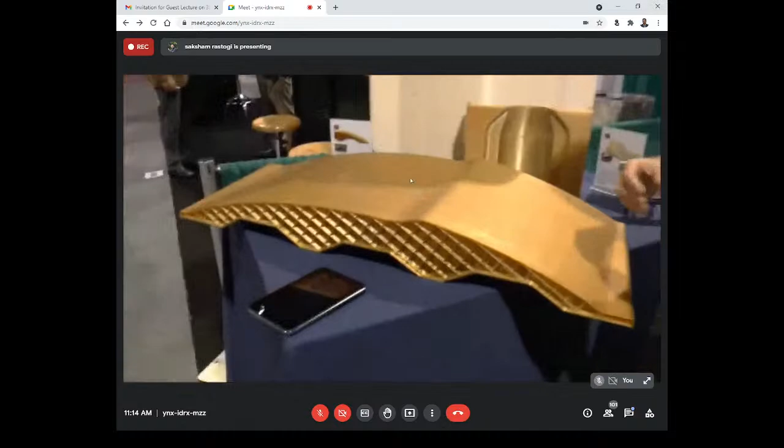We're launching our new composite tooling design guide, as well as our new sacrificial tooling solution. Here we have a few of those tools on display that we've developed for Dassault Falcon Jet. This is a high temperature layup mold, as well as another one over here, and the associated low temperature machining fixture. We've been working with this customer to transform how they design their tools and make them suitable for the additive manufacturing or fused deposition modeling process.

These are really great examples of the economic power of the solution too. With this particular customer, the Falcon Jet, their existing tools cost about $50,000 to $60,000 and take 10 to 14 weeks to acquire. We were able to print this tool in less than 2 days for a cost of about $3,500. So as you can see, a pretty disruptive solution. Works really great particularly for lower volume tooling, but we're looking at it for production tooling as well with them, really testing it out to prove its full capabilities.

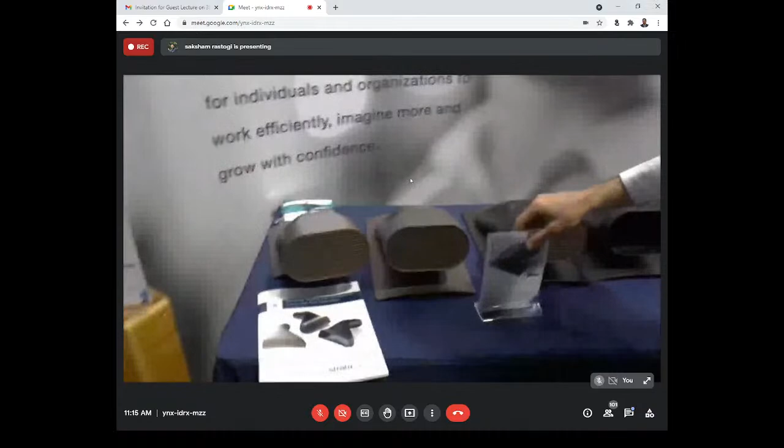If we walk over here, I can show you a couple more examples. Here's our new sacrificial tooling solution, called ST130, as well as the comprehensive design guide that you see here that goes along with that. This is an aero duct that we worked with Swift Engineering on in multiple stages.

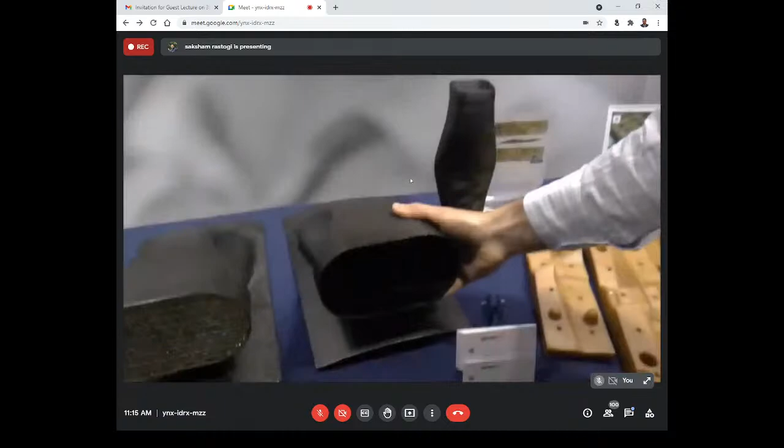Here it is right off the printer. Here it is sealed and ready for layup. This is where the part is laid up on top of that mandrel or mold. As you can see, there's some resin flashing here that once you wash away shows your final part, that all goes away. This particular part went from concept design to tool in hand in less than a week, and the tool was laid up in 1 day and washed away in 8 hours. Really great time efficiency for this solution as well.

If you weren't using 3D printing, how would you have done that?

You would use a traditional washout material such as a eutectic salt or a low temperature plaster material, or you'd have to go to a combination of hard tooling where you lay up the part in halves, in sections, and bond that together, which takes additional tooling and additional process time. In this case, you really go from CAD model to tool.

So you have seen with the composite tooling solutions there are many examples. The aerospace industries are most dependent on composite tooling solutions, like Aurora Flight Sciences, Boeing, Airbus, Dassault Falcon, Champion Motorsports. These are examples where they are using Stratasys FDM materials and solutions to make composite tooling and sacrificial tooling, minimizing and disrupting manufacturing technology by using the benefits of additive manufacturing.

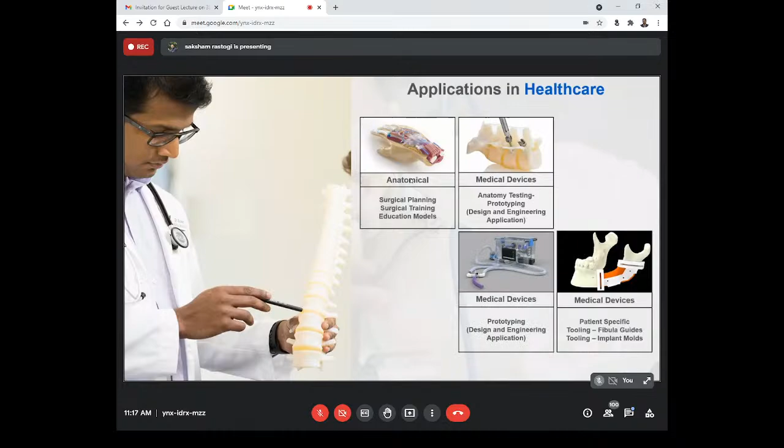Apart from automotive engineering and heavy engineering industries, it can also be used in healthcare sections to make anatomical parts, medical devices, for anatomy testing, prototyping, or for design and engineering applications for medical devices, and also to make patient specific tooling solutions like fibula guides, implant molds, or surgical guides. There are two types of categories in medical devices.

General purpose medical devices like ECG machines, X-ray machines, CT machines - we can use this technology for product development of these kinds of medical devices, to make implants, to make anatomical models, to check fitments of screws or implants, to make prototypes of medical surgical equipment, and also to make patient specific medical devices like fibula guides or surgical guides, which can be designed and fabricated as per the specific patient anatomy.

These are biocompatible materials, so these can be fitted inside the human body or animal body, and can be used as surgical guides. These are some examples, like for orthopedic surgeries, we can 3D print patient specific anatomies of bone structures, which can be used for

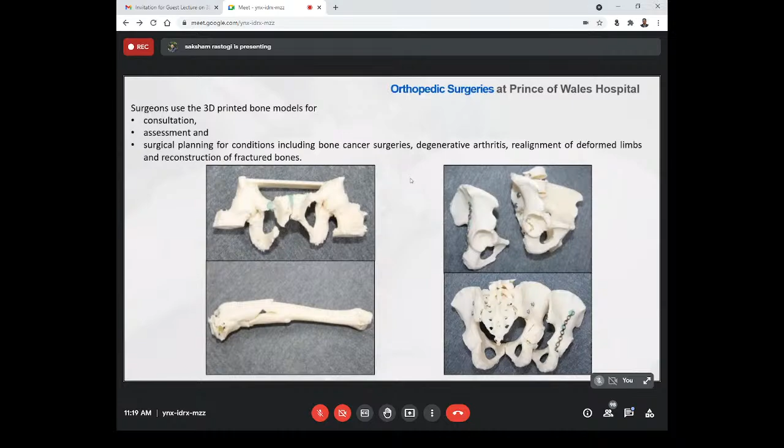conditions in bone cancer surgeries or arthritis, realignment of deformed limbs, and also for reconstruction of fractured bones. Medtronic is a world-leading surgical equipment manufacturer company.

So they use this technology in a very efficient manner. Medtronic in the US and India use the Stratasys solutions for product development and prototyping with biocompatible materials like PC-ISO, which is a USP Class 6 certified material, enabling them to test out their prototypes on the anatomies before going into production application. They are also using it for tooling applications in the healthcare industry.

In IIT Bombay, there is a lab called BETIC Lab, funded by the Department of Biotechnology. Their basic agenda is to develop high quality, low cost medical devices suitable for the local population. There are BETIC labs all around India, in various states and cities, across research organizations.

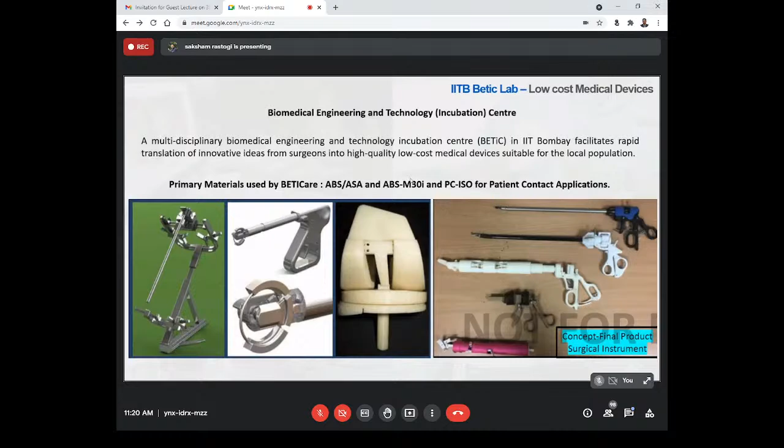Most of the BETIC labs use Stratasys machines because of the materials available, their strength, and the certifications for biocompatibility. The ABS M30i and PC-ISO are very good, certified materials for patient contact applications. You can see in the photos the developing stages of their particular products.

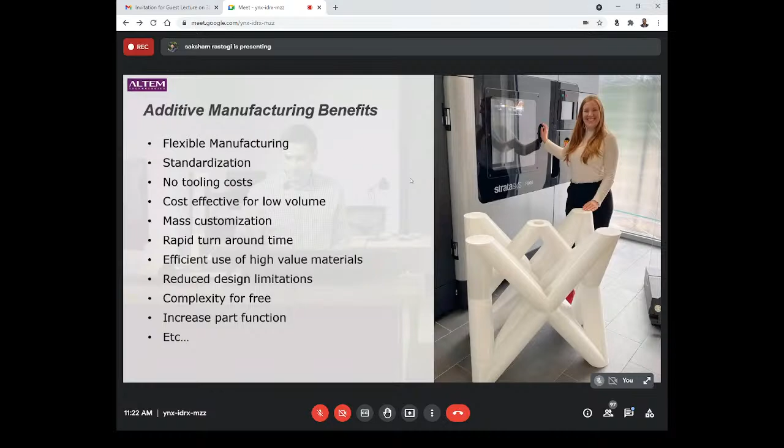To conclude this session, the benefits of additive manufacturing are: flexible manufacturing, allowing us to produce any kind of complex structure; standardization of the manufacturing floor; no tooling cost; cost-effective solutions for low volume production and mass customization; rapid turnaround time; efficient use of high value materials; and reducing design limitations, enabling complex designs. I would like to thank all of you for being very patient listeners.